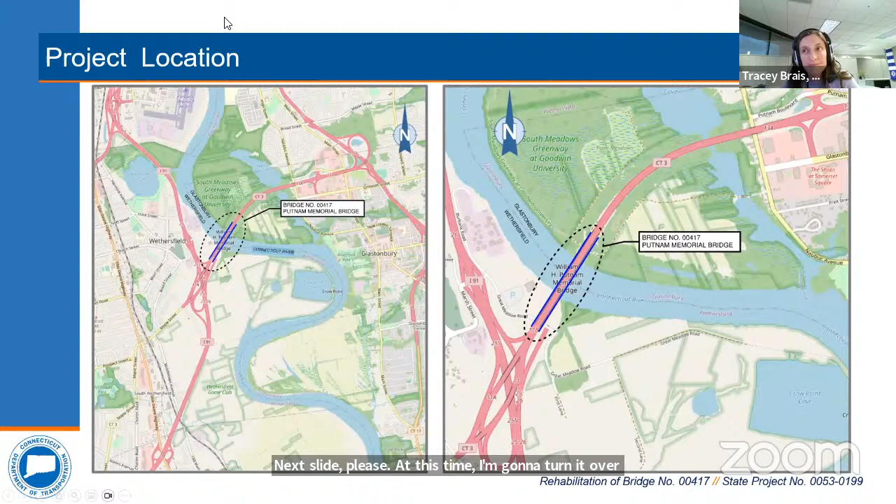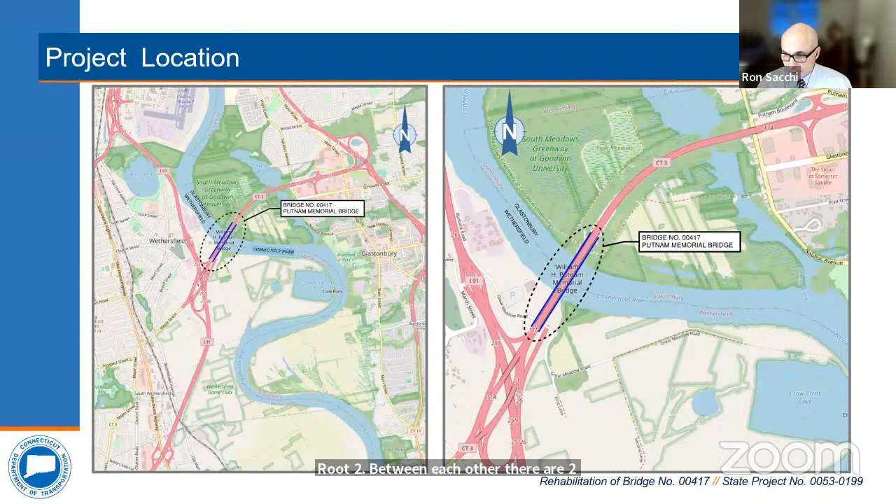Okay, thank you, Tracey. So the Putnam Memorial Bridge, the two location maps here, one's a little farther out, one's a little closer up. The Putnam Memorial Bridge essentially carries Route 3 over the Connecticut River, and it connects Interstate 91 and Route 2 between each other. There are 2 lanes northbound and 2 lanes southbound. And it's a limited access highway through this stretch.

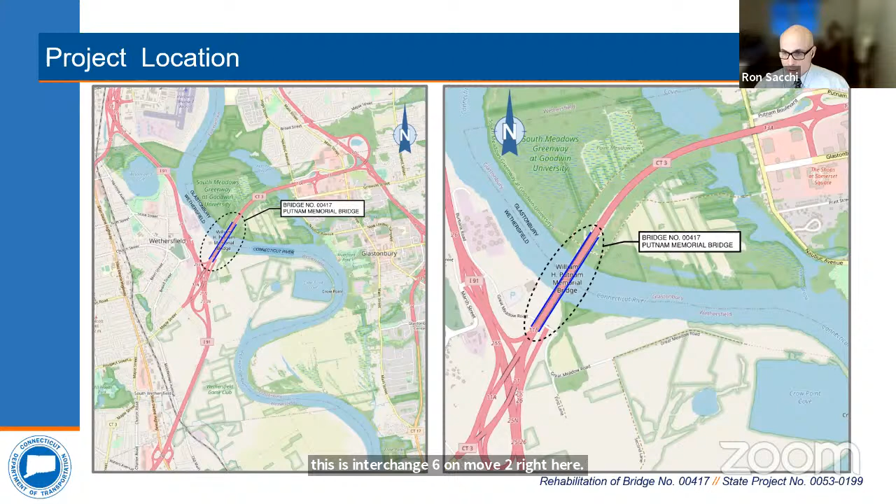And as you can see, Interstate 91 here, along this stretch right here, interchange 25 is the interchange that provides access to Route 3. And this is interchange 6 on Route 2 right here. A little closer view here shows the interchange 25 on 91 and the Putnam Memorial Bridge with the Connecticut River and also Crow Point Cove.

So this is kind of an aerial view of it. And, as you can see, the town line between Glastonbury and Wethersfield pretty much runs right down the middle of the river. There is a navigation channel under span 7, which is on the Wethersfield side of the center of the river under the bridge. You could just barely see interchange 25 and 91 in the lower left-hand corner.

The average daily traffic across this bridge going northbound, which is basically Wethersfield to Glastonbury, is about 28,100 vehicles per day, and traveling southbound, from Glastonbury into Wethersfield, is about 27,000 vehicles per day. There's a multi-purpose trail that has been under construction that will connect Glastonbury to Wethersfield, and a portion of that trail will travel over the southern fascia of this bridge. And we'll get to more of that in a moment.

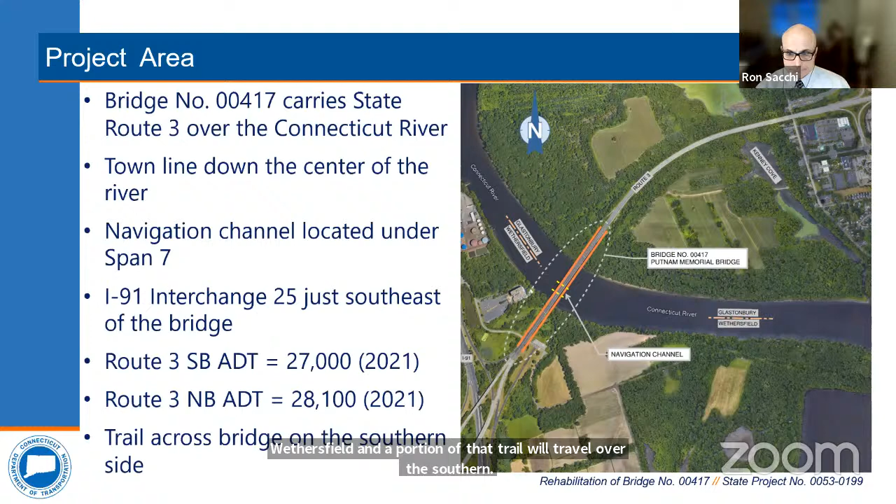So just before we get into stuff, let me explain some basic terminology that we'll use here. Basically, a bridge can be broken into two broad groups. One is the substructure and one is the superstructure. The substructure is essentially any bridge element that's founded on the ground or into the earth. For example, the abutment is basically a big wall withholding some earth where the steel beams rest on. The wing wall is a wall on the side, again, retaining the earth embankment for the highway. There are piers that provide intermediate supports for the steel beams.

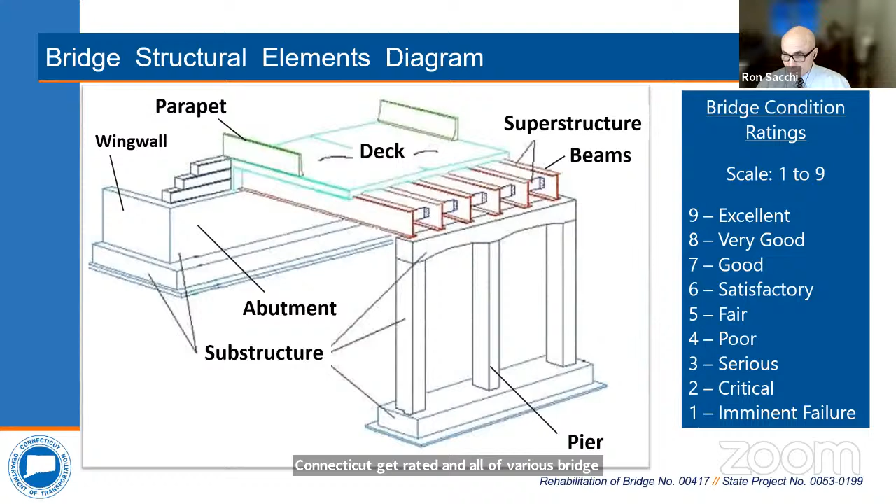And then the superstructure really contains your steel beams, your concrete deck and the parapets, which are really the sides of the bridge that contain the vehicles on the bridge. There's also a bridge condition rating scale between 1 and 9. Every 2 years, all the bridges in the state of Connecticut get rated, and all the various bridge elements also receive a rating. And so for the Putnam Bridge, the overall structure condition was given a 5. It's in fair condition. The steel girders are rated as a 5, and the concrete deck is also rated as a 5, fair. The substructure is rated as a 6, in satisfactory condition.

And as you can see here, we have a typical cross-section of this bridge. This bridge is what's considered a two main girder bridge with floor beams and stringers supporting a concrete deck. We have 2 lanes traveling northbound, 2 lanes traveling southbound. It was constructed about 65 years ago in 1959. The total length of the bridge is 2,393 feet, almost half a mile, and it contains 14 spans, 2 abutments, and 13 piers. The longest spans, spans 7 and 8, are the 2 over the center of the river at 319 feet each.

As I mentioned, 2 lanes in each direction. Each travelway or each barrel of the bridge is almost 32 feet in width, providing a total width of the bridge of 69.6 feet. And as I just mentioned, it's a 2 girder structure that supports the entire superstructure, 2 main girders.

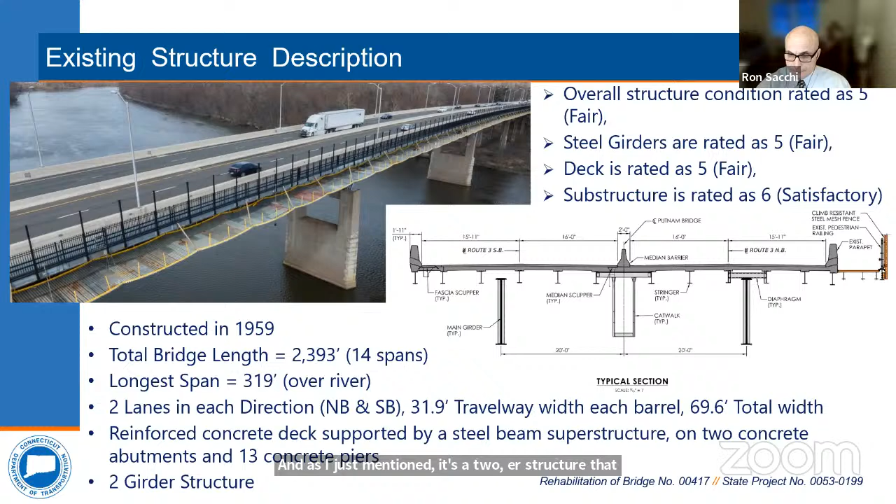So the purpose and need of this project is really to address structural deficiencies of the Putnam Bridge to ensure safe travel for all facility users and to maintain a state of good repair. And in doing that, we will be repairing and replacing any deficient structural members, ensuring that the bridge continues to load rate appropriately for all legal, permit, and emergency vehicles, improving the condition rating of all structural elements to satisfactory, a 6 or better, and doing all of this while minimizing disruption to travel on State Route 3.

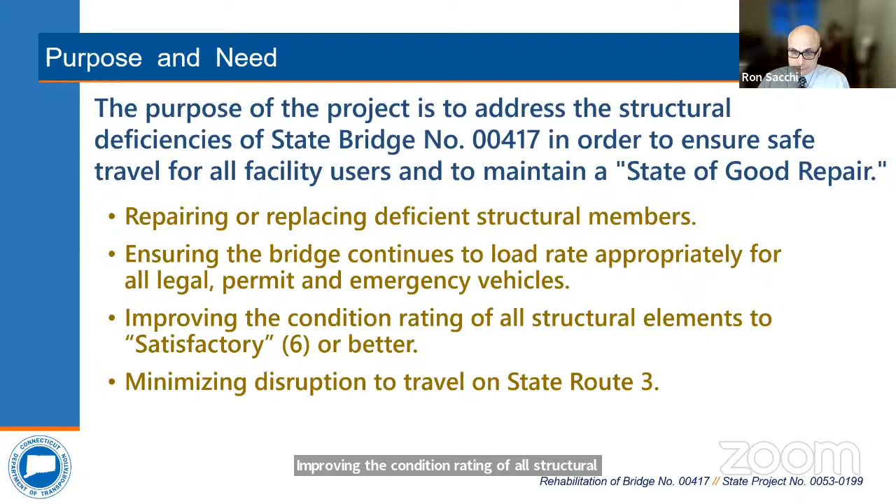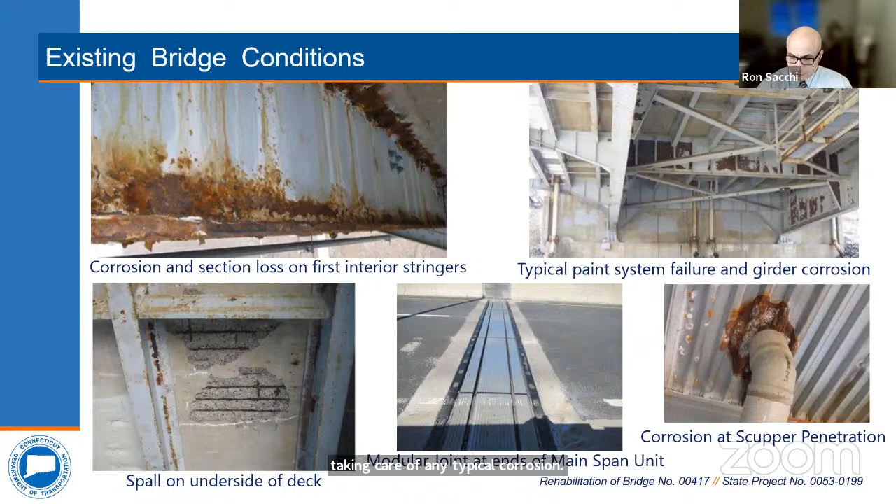So the goals of the rehabilitation work are really twofold. One is to get the load ratings up for all legal, permit, and emergency vehicles. We're looking for load rating factors of 1.2 or better, and to extend the service life of the bridge for another 20 to 25 years.

And in doing that, the rehabilitation work is really comprised of strengthening repairs to the steel girders. Basically, the 2 main girders of the bridge is where all those repairs will be focused. Patching and repair of the deck slab, placing a new waterproofing membrane on top of the deck slab, replacing all the expansion joints in the bridge, including those main span expansion joints, and then repairs to get all other bridge components up to a condition rating of satisfactory, a 6 or higher.

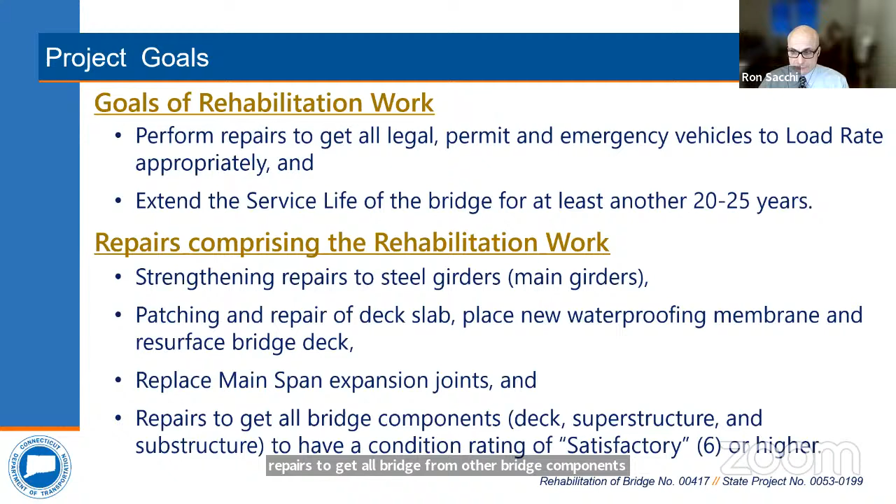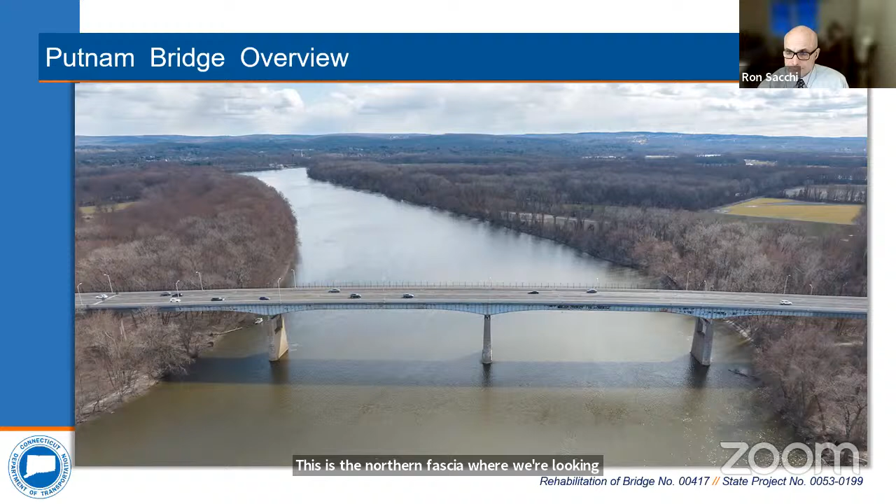So here's an overview of the Putnam Bridge. This is the main span unit, which consists of 4 spans over the river. This is the northern fascia where we're looking south along the river. So this is a plan and elevation of the bridge. In blue in the center of the page, you'll see the limits of the Connecticut River under the bridge. The orange represents the bridge structure itself. The approach roadway is in gray on each side.

And in magenta is the new trail that's being constructed on the southern fascia of the bridge, using the walkway on the southern fascia of the bridge as part of that trail. There is a little splinter off trail on the Glastonbury side that travels under the bridge as well, to some additional trails on that large floodplain on the Glastonbury side. On the elevation views, you can see the navigation channel called out under span number 7.

And just to call your attention, when we talk about approach spans and main spans, the main span unit consists of the 4 main spans over the Connecticut River, which are these 4 spans in the center that you see right here. These are the ones that have those haunch girders that you saw in the previous picture. And it's almost a separate bridge in and of itself from the approach spans. The approach spans are the ones that travel over the riverbanks on the side of the bridge and provide the approach up to the main span structure.

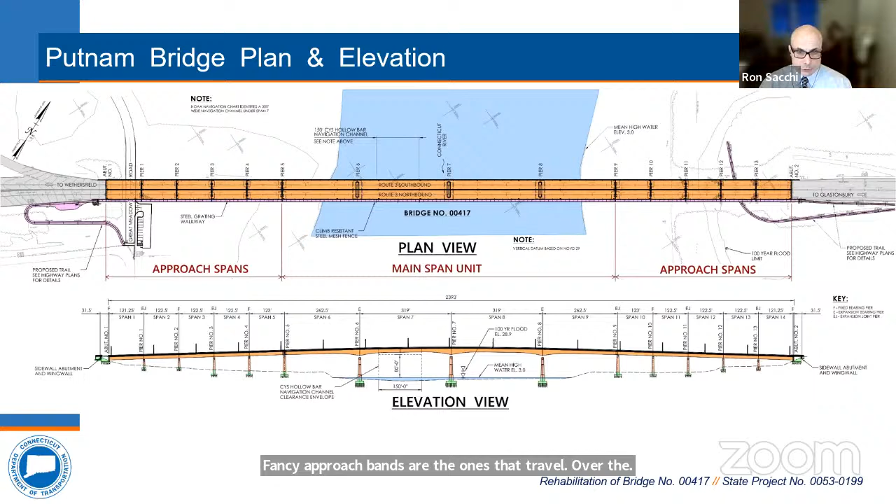So just to reiterate our anticipated scope of work, being a little more particular, we intend to install girder bracing and cover plate extensions on the main girders to improve the load ratings. We'll be doing bridge painting, the scope of which has yet to be decided whether it's focused or painting the entire bridge. We'll be stripping the asphalt off the bridge, repairing the existing deck slab with something we call a strip, patch, membrane, and overlay type of project, SPMO for short.

We'll be replacing all the expansion joints, including those big modular joints at the end of the main span. We'll be doing miscellaneous repairs to the steel stringers and existing abutments and piers, to get the condition rating up to a 6 or better on all the bridge elements. And we'll be doing this with M&PT with 1 lane maintained in each direction when we're doing repairs on top of the bridge on the deck.

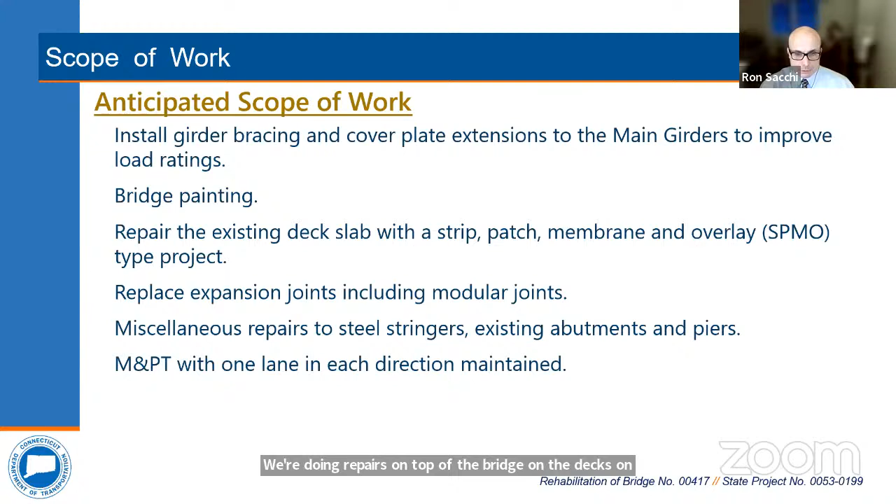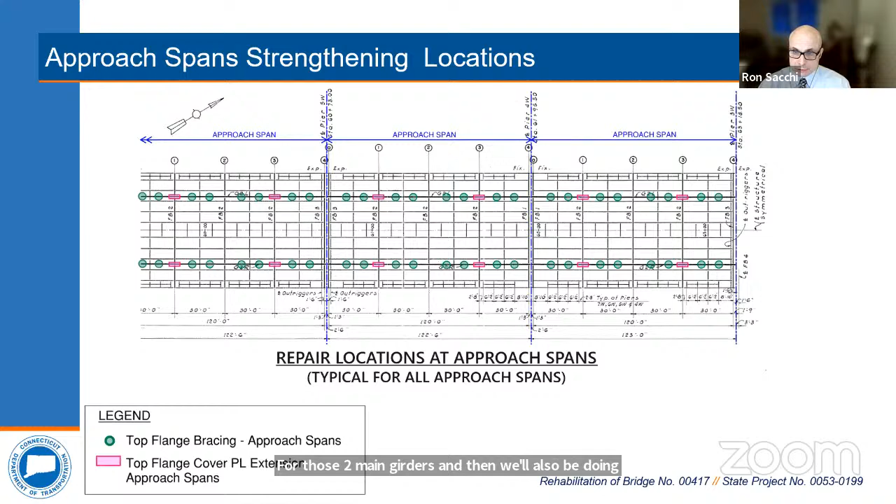So specifically, these are the repair locations at the approach spans. What you see in the center of your screen is 1 typical approach span. There's 5 of these approach spans on the Wethersfield side and 5 on the Glastonbury side. So these would be typical repairs for all the approach spans. The green circles represent some top flange bracing for those 2 main girders, and we'll also be doing some top flange cover plate extensions. Those are the magenta rectangles, and I'll show you some details of those.

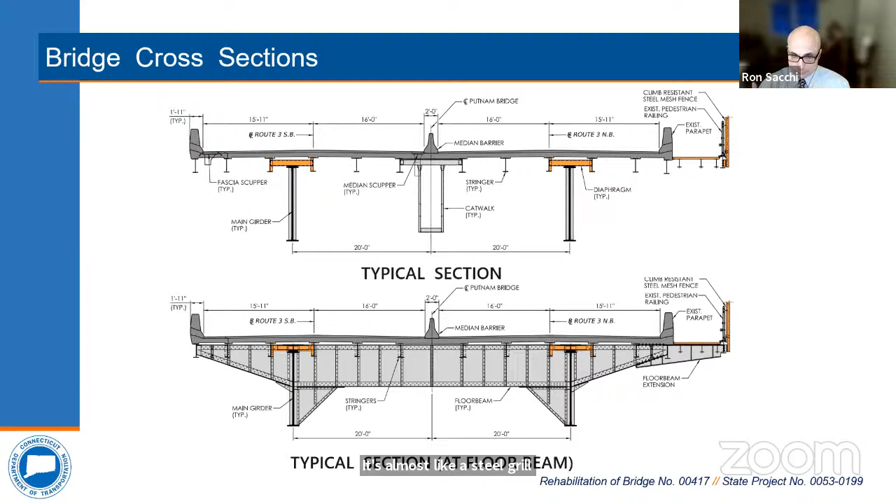So again, here are some typical sections of the bridge. The upper typical section is a section showing the main girders, and you can see the stringers. Now, the stringers are connected to the floor beams, which is shown in the section below. And then the floor beams, every 30 feet, are connected to the main girders. It's almost like a steel grillage of steel beams that supports this reinforced concrete deck slab.

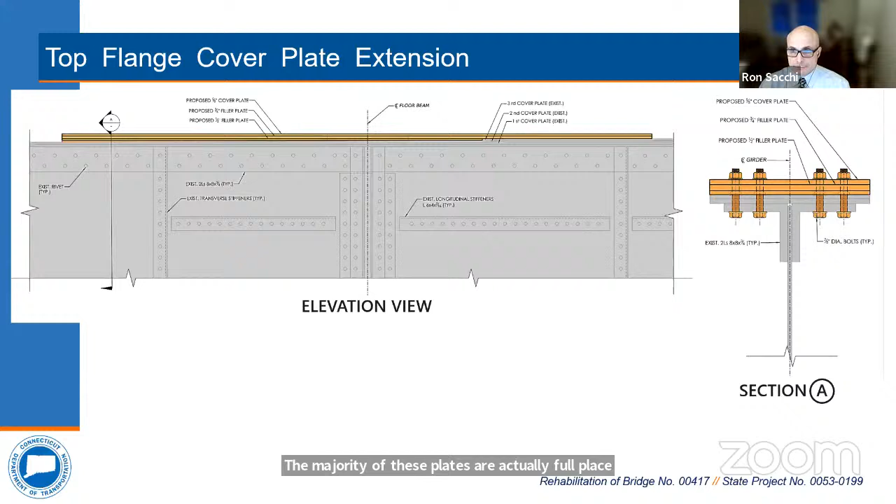And then this is your typical cover plate extensions. The majority of these plates are actually fill plates because we're dealing with riveted construction on this girder, and this is just to kind of incorporate the rivet heads into the construction. That top flange plate essentially is acting as the cover plate extension.

And then for the main span, we'll have similar strengthening. As you can see, we have the green circles, which represent top flange bracing. We have blue triangles, which represent bottom flange bracing. This bracing is a little more complex, and we'll have a detail of that. And then we have a couple of locations where we retrofit what we call a longitudinal bottom stiffener. That's a pretty straightforward repair.

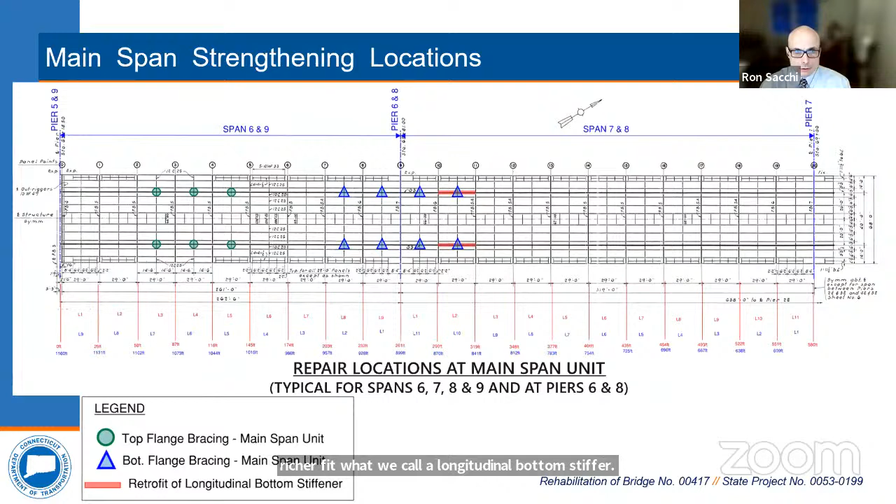So again, similar to the approach spans, these are called shear blocks. They basically keep the top flange of the girder in place, prevent it from doing any lateral movement. It can still move up and down as it needs to deflect under load.

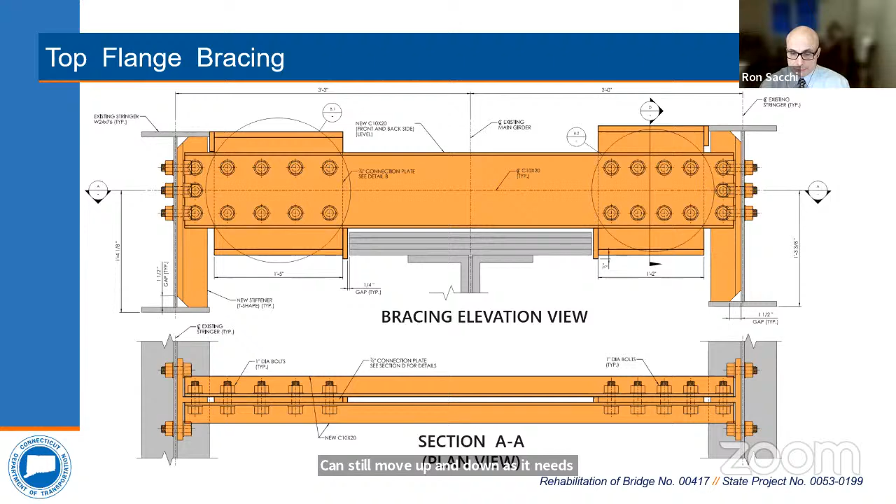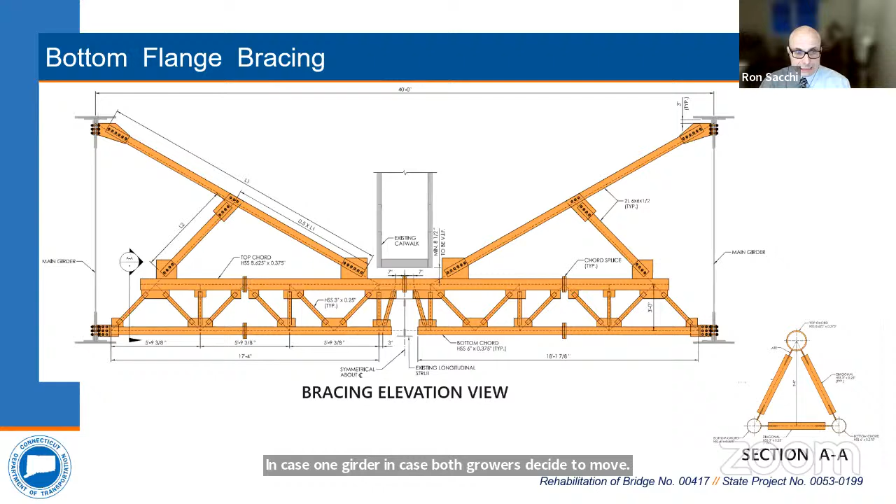This is bottom flange bracing, and what we're doing on here is essentially bracing the two bottom flanges of the main girder with what is essentially a truss, a three-dimensional truss. And the reason why we need this is because we're bracing the girders off of each other. In case both girders decide to move, or the bottom flange decides to deflect sideways, this truss will keep it in place. There are 8 locations on this bridge where this truss is required.

And then this is the longitudinal stiffener that we're placing on the lower portion of the web on the main girder in some select locations. It's a pretty straightforward repair.

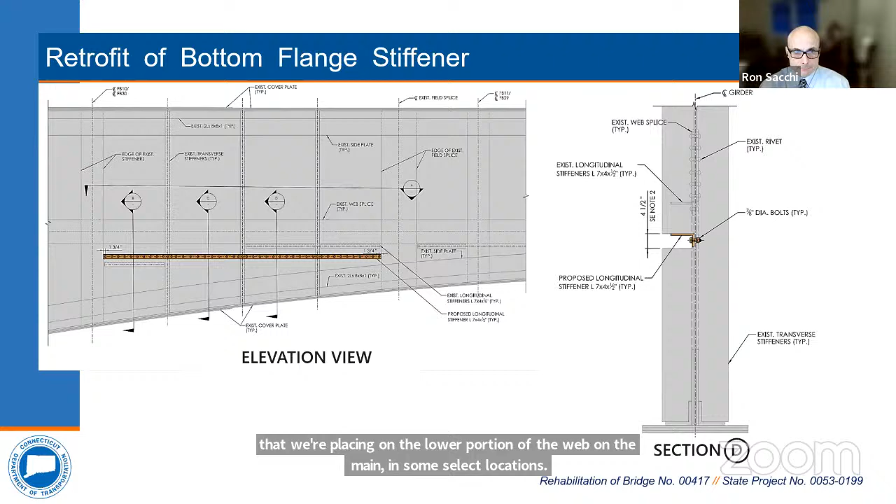So anticipated impacts to this project, the biggest one is going to be the traffic and interfering with the normal traffic flow in off-peak hours. When we're doing top of deck repairs, we'll probably have to close one lane in each direction. If any longer lane closure durations are required, it may involve a weekend closure, which will involve a detour, and that detour would be over the Charter Oak Bridge. And at this point, we're not expecting any long-term closures or detours of any portions of the bridge.

The wetland and watercourse impact will be minimal. There'll be no permanent impacts to the wetlands, but there'll be some temporary impacts because we'll have to construct some access roads just to get access to some of these piers that are located in some wetland areas. When I say wetlands, these are kind of river overbank areas. They're not actually wet or swampy areas, but it's just poorly drained soil, which has been flagged as wetland type soil. We'll be restoring those wetlands fully when the project is complete.

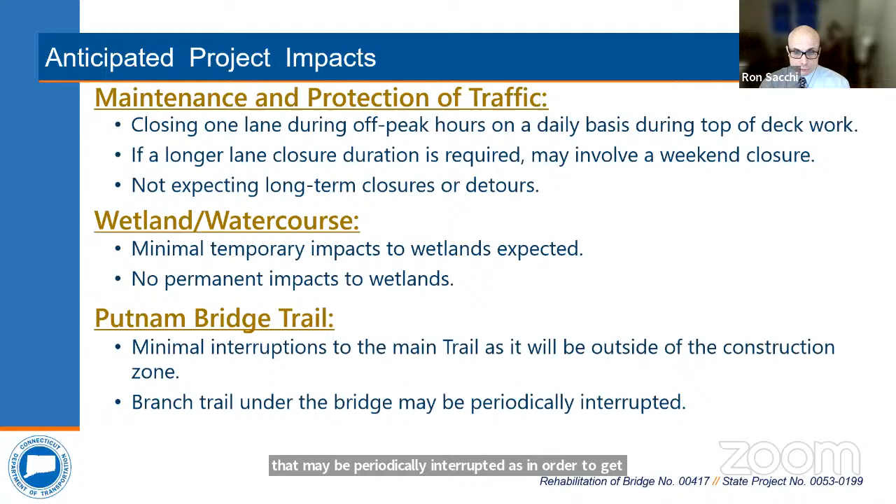And as far as the Putnam Bridge Trail, which is slated to open sometime this spring, there will be minimum interruptions to the trail, as it will be pretty much outside what we will be constructing. We're hoping there will be virtually no interruptions to the trail traffic at all. There is that branch trail that travels under the bridge on the Glastonbury side that may be periodically interrupted, as in order to get access to some of the piers closer to the river, we have to cross that trail.

And this is just a depiction of what the detour might be via the Charter Oak Bridge if it is required. And this is just detouring the southbound traffic, and what that detour might look like.

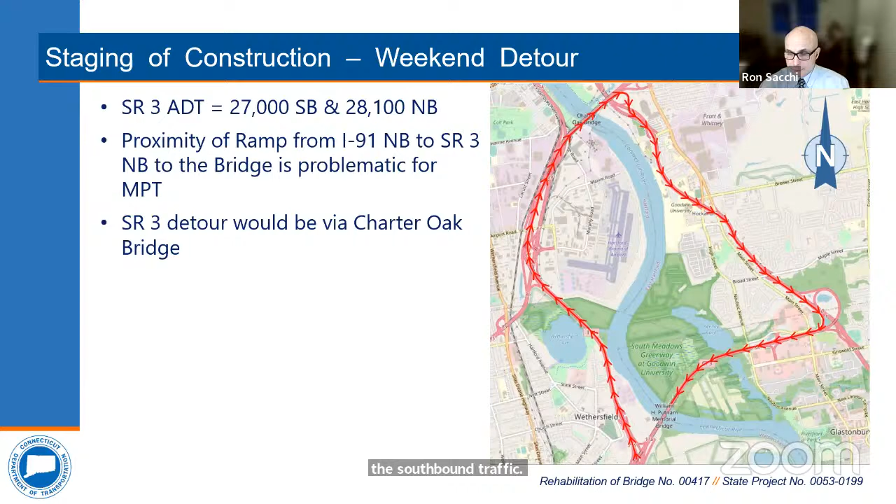And I'll turn it back over to you, Tracy. All right, thank you, Ron.

So based on the current project schedule, assuming that we get all permits approved in time, construction's anticipated to start in spring 2026, and it's anticipated to be completed in December 2027. So 2 construction seasons to perform all of this work.

The current anticipated construction cost is $31.36 million. But at this time, we are also evaluating fully painting this bridge, and whether or not that is a cost-effective solution at this point. If we did that, the cost would be more like $65.3 million. The construction cost is covered with 80% federal funds and 20% state funds.

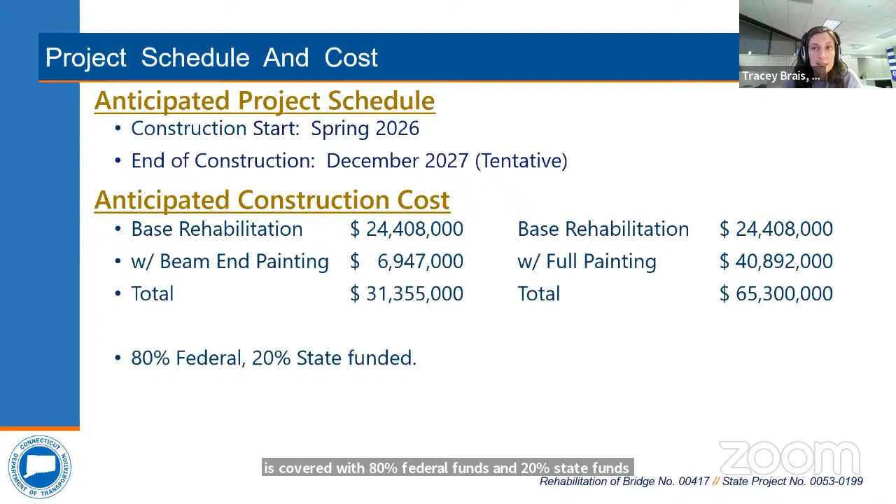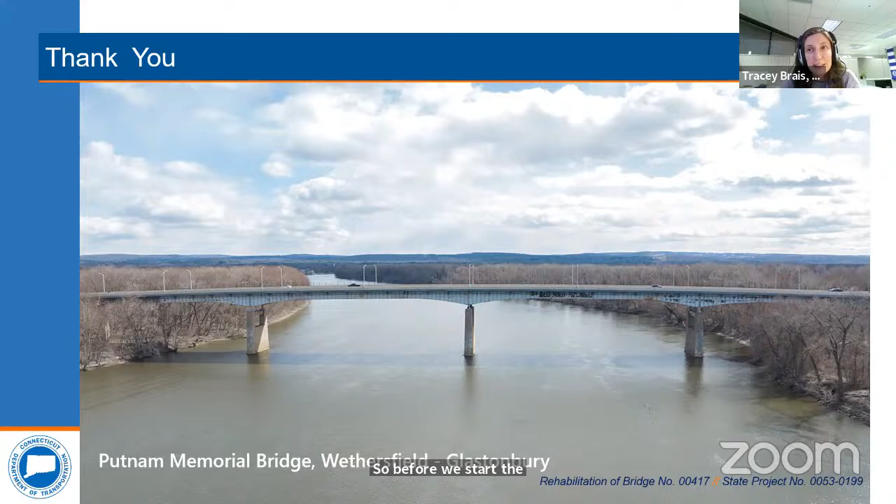So before we start the Q&A session, we'd like to thank you all for taking the time to attend tonight's meeting. We really appreciate any comments or questions. It helps us make the project better, successful. Because that's ultimately what we want to do. We want to minimize the impact to commuters through here. And then, of course, make sure that the bridge remains in good shape, in service, and safe for many years to come. So we hope you've found this presentation informative, and at this point, we will open it up to questions.

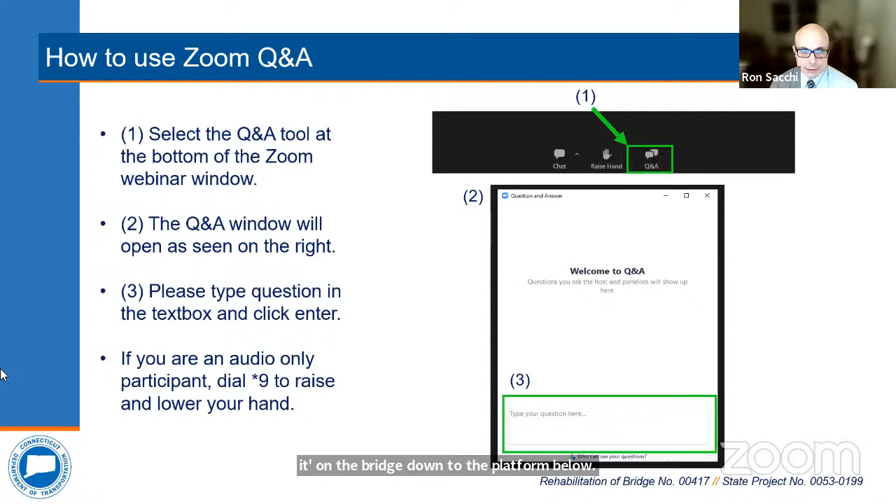And accessing equipment down below onto that platform will probably be done in off-peak hours with maybe an over-the-side hoist, lowering it down from one of the lanes on the bridge down to the platform below. And we're not intending to encumber that trail at all with any kind of construction equipment or trucks or anything like that. They will not access that trail. Access will be through either Great Meadow Road on the Wethersfield side or that one access road off of Route 3, just on the Glastonbury side.